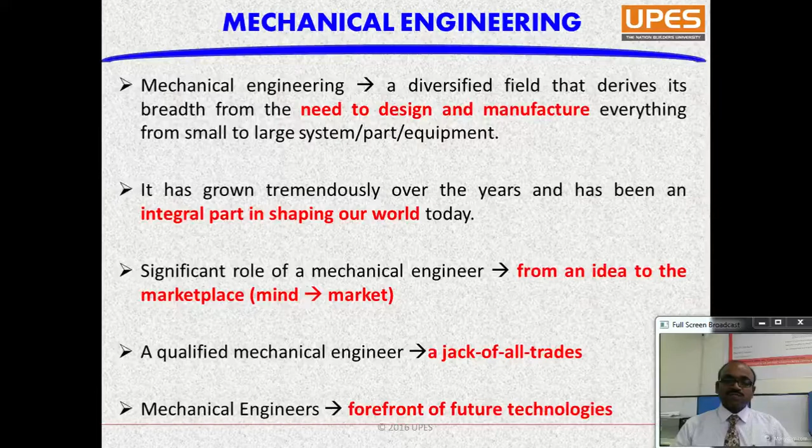A qualified mechanical engineer can be said to be a jack of all trades. He is the basis, a benchmark for all types of trades in different fields, from electronics to automotive, aerospace and all. We can say a mechanical engineer is at the forefront of future technologies. For all the future technologies and systems we are doing R&D on, mechanical engineers would be our forefront leaders.

Mechanical engineers play a key role in various industries. For example, automotive industries, which consist of passenger and mass transportation; aerospace and air applications, including air transportation; the biotechnology field, with fluid systems for pharmaceutical industries; and computers and electronics industries, with major applications in drives, printers, cooling systems, semiconductor tools and so on. In all these fields, mechanical engineers play a key and vital role.

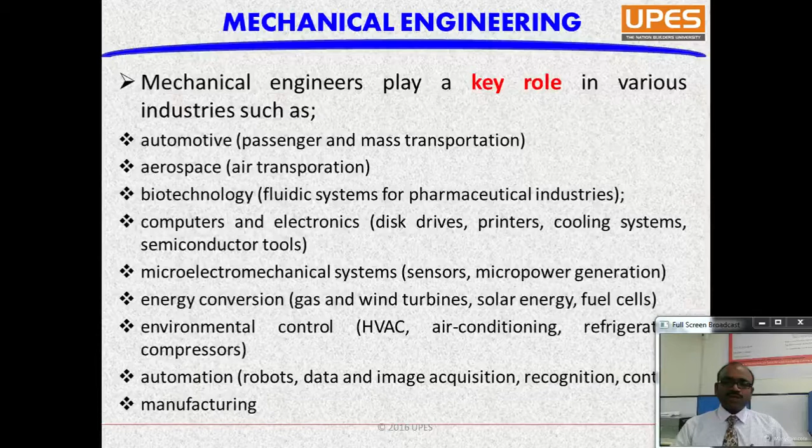And some other industries like micro electromechanical systems, where we observe sensors, micro power generation systems and so on. Energy conversion systems like gas turbines, wind turbines, solar energy, and fuel cells, which convert chemical energy to electricity. Environmental control systems: heating, ventilation, air conditioning and refrigeration, and different types of compressors. Automation, with robots, data and image acquisition, human and biometric recognition, and control systems. And lastly, manufacturing sectors. In all these sectors and fields, mechanical engineers play a key role.

Now we'll see why thermal engineering expertise is required, what about conventional mechanical engineering, and what are the significant differences with BTech mechanical engineering with specialization in thermal. Energy-related topics such as sustainability, renewable energy, clean and green energy are terms we frequently use, and they are frequently cited as the most cutting-edge disciplines for the next 10 to 20 years.

In all these energy sectors, significant technological developments or modifications in terms of energy efficiency are required. This energy efficiency reminds us of the thermal assessment or thermal analysis of systems. Examples include low temperature resources, where we use many types of Rankine cycles or thermodynamic cycles for power or energy conversion, as well as waste heat analysis, process heating assessment, and combined heat and power applications. In all these fields, thermal analysis plays a significant role where conventional mechanical engineering may not be feasible.

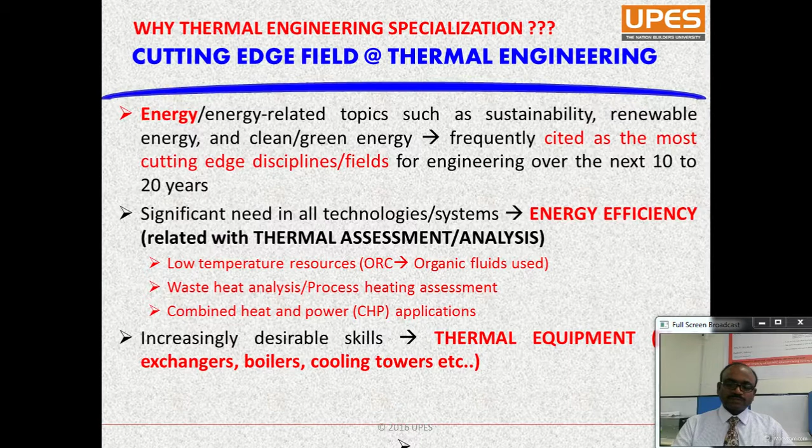Professionals in the field of thermal engineering strive to develop a more efficient means for transferring energy from one form to another. Expertise in heat transfer is helpful in conversion of energy from any form, chemical or fuel, whatever it may be, to electricity or the required form. This expertise will be very helpful.

Transforming power grids to create more affordable electricity has become one of the most popular fields utilizing the expertise of thermal engineers. Thermal engineers dedicate their efforts to refining electronic systems and safety applications. In heat transfer in processes and equipment like electronic devices, expertise in thermal engineering would be helpful. In heating and cooling systems, where sustainability of the systems is necessary, thermal engineering or heat transfer expertise is significantly required.

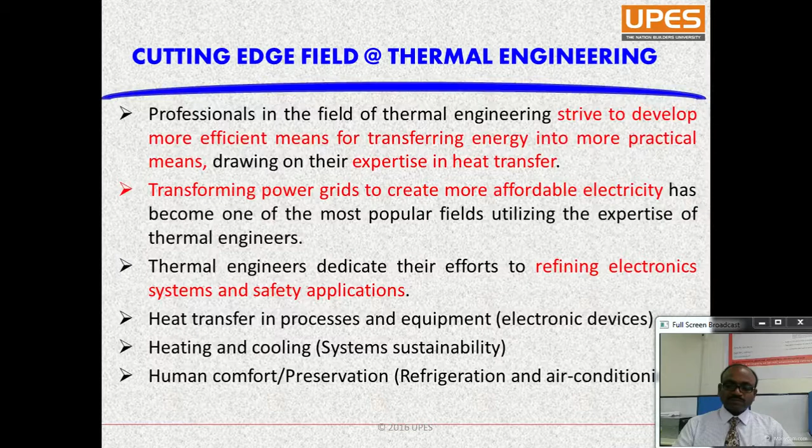Human comfort preservation remains the field of refrigeration and air conditioning, which involves temperature and humidity, all of which concerns thermal analysis or thermal assessment. As I have shown in some figures depicting laptops or computer systems in the computer era, cooling of integrated circuits, printed circuit boards, PCBs, microchannels. In all these applications, higher heat transfer rates are significantly required.

Suppose I take a laptop: if it has a problem with the cooling fan, it immediately goes down because of the cooling problem. So there, cooling of microchannels and cooling of the ICs is an urgent need. Otherwise, my system will go down.

Similarly, in automotive applications, where engine design comes up for analyzing the performance and emissions, we need thermal analysis. If I talk about the performance of the engine, definitely I would say the combustion inside the combustion chamber of the engine. Combustion again is a function of temperature; at higher temperatures we get higher performance. So without thermal analysis, analyzing engine or automotive applications would be meaningless. I have to depend on thermal analysis, where my thermal engineering expertise is significantly required.

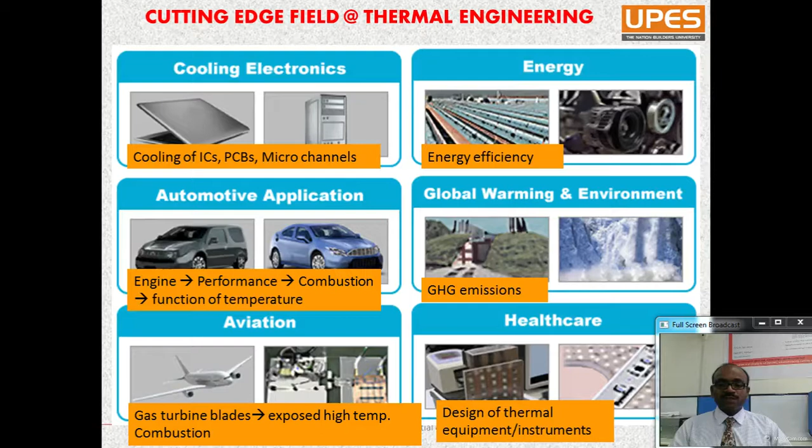Another important field is global warming and environment, where emissions come to mind, like greenhouse gas emissions such as CO2, carbon dioxide, nitrous oxide, methane, and so on. These emissions again depend on the temperatures and thermal performance of the systems. Another field where thermal analysis expertise is required is healthcare, where design of thermal equipment and instruments is badly needed.

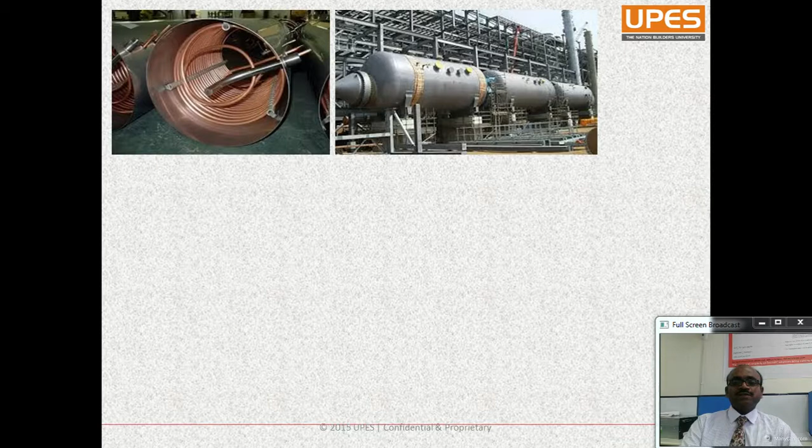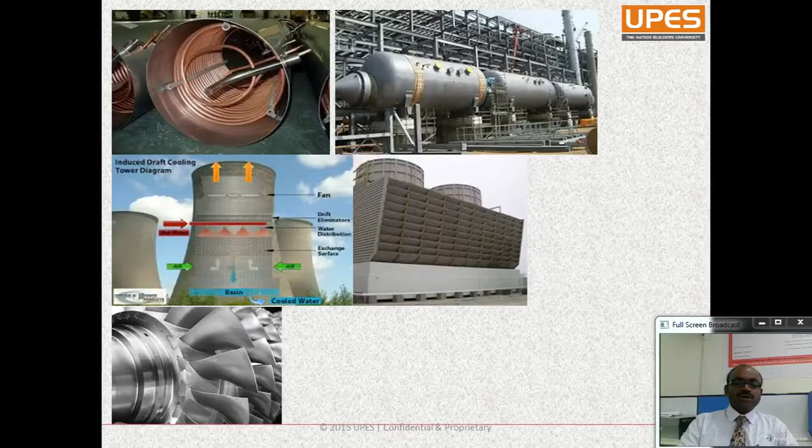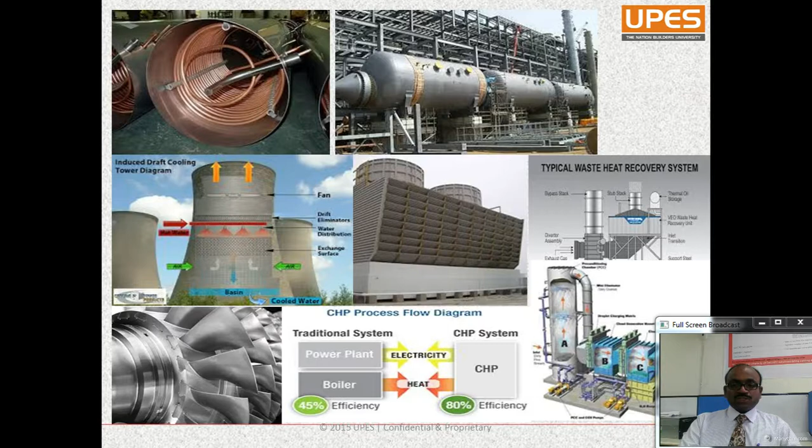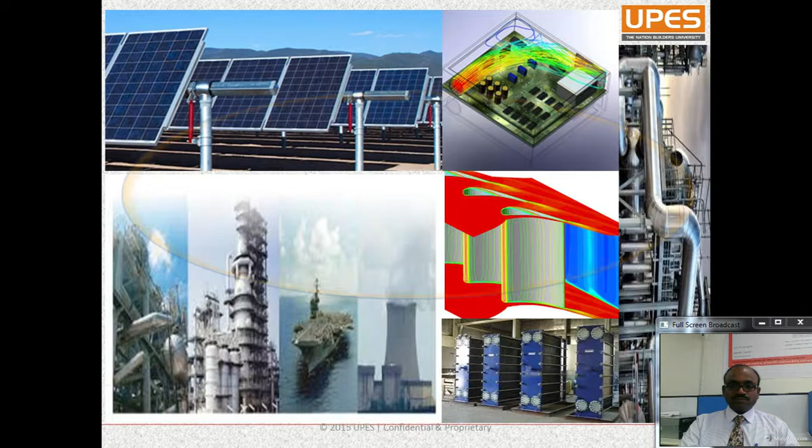Finally, I would like to emphasize that mechanical engineers equipped with additional expertise in thermal engineering are highly valued in corporate work. Now we will see about the new program, BTech Mechanical Engineering with specialization in thermal engineering.

The new program consists majorly of three categories: core courses, which cover from first semester to sixth semester. In alignment with the mechanical engineering program, all subjects are common with the mechanical engineering program. In sixth and eighth semesters, program electives come up based on thermal engineering expertise. From sixth sem onwards, we take the students towards thermal engineering expertise.

Majorly, all electives are focused on thermal engineering subjects such as advanced thermodynamics, advanced heat transfer analysis, waste heat recovery systems, thermal analysis of waste heat recovery systems, and thermal assessment of low temperature heat sources like solar energy and waste heat, process heat, and finally a major project specialized in thermal engineering, which may align with fluid flow analysis.

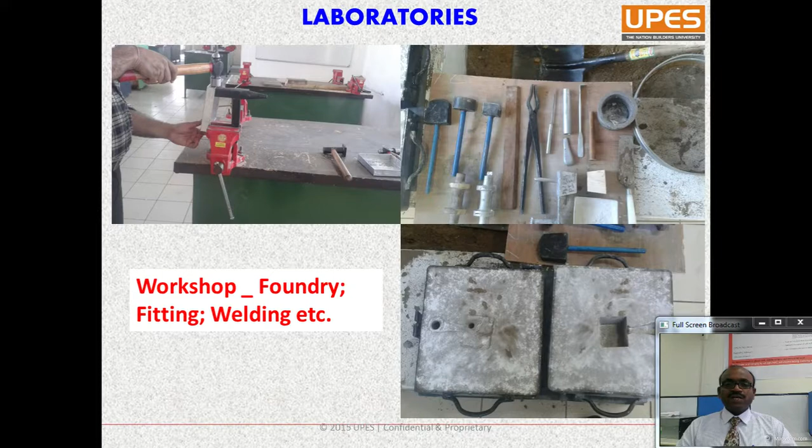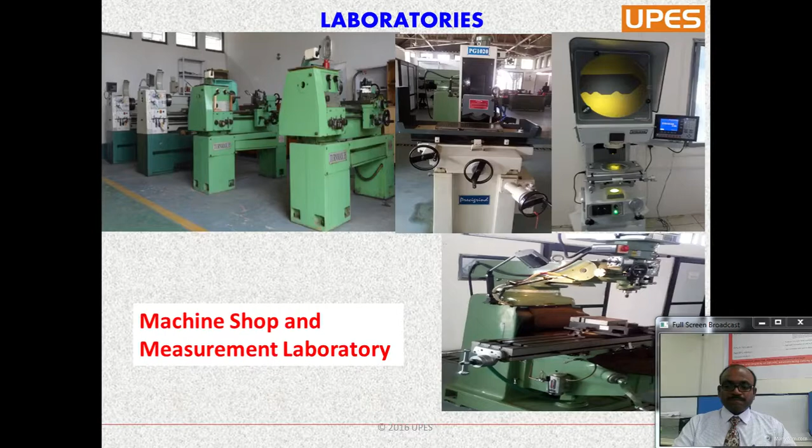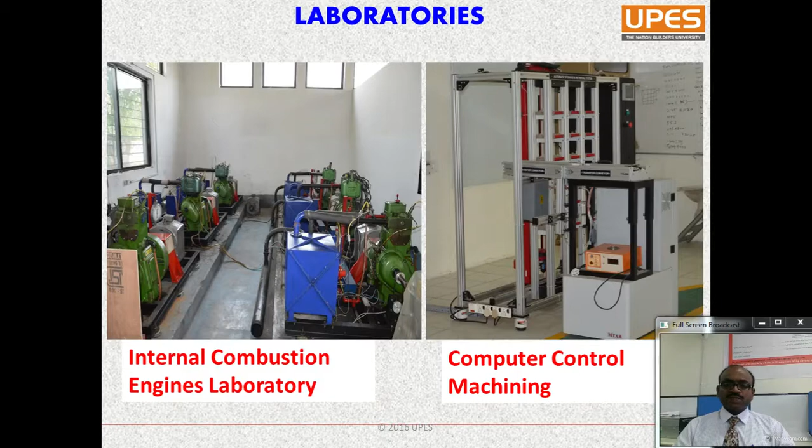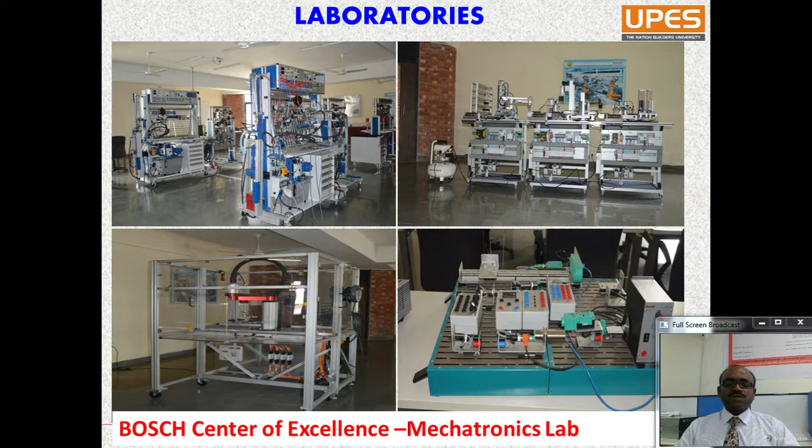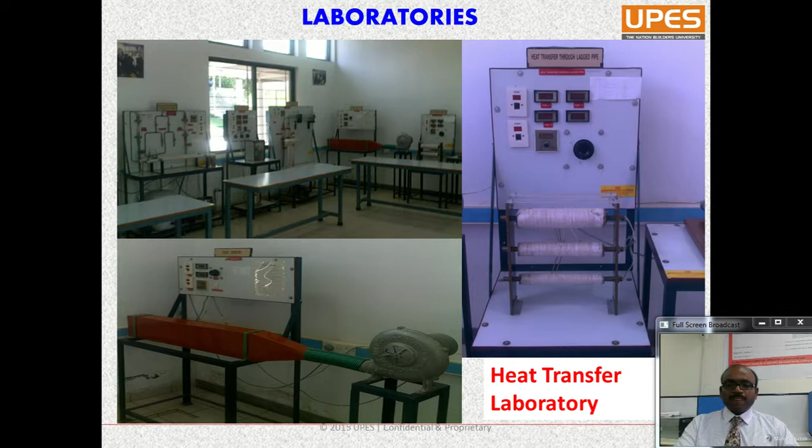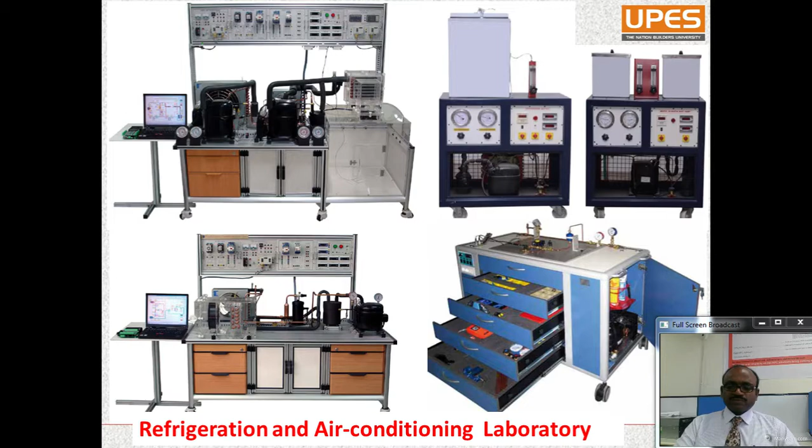I would like to talk about the significant career opportunities for thermal engineering expertise, as various industries and fields are offering many career options for mechanical engineers, especially with thermal engineering expertise. As I was mentioning the differences between conventional mechanical engineering and engineering with thermal expertise, students may be offered many opportunities where thermal engineering expertise is required, like thermal power plants.

With conventional based systems, thermal power plants like solar thermal power plants and waste heat recovery systems. Students having exposure to solar thermal power plants may easily get placed in these systems. Similarly, automotive industries are open to mechanical engineers, aerospace industries, ship and railroad companies, processing industries, design utility companies, steel industries, foundry, civil construction companies, waste heat recovery energy systems, food processing industries, garment industries, pharmaceutical industries, pulp and paper technology industries, academia, and consulting companies.